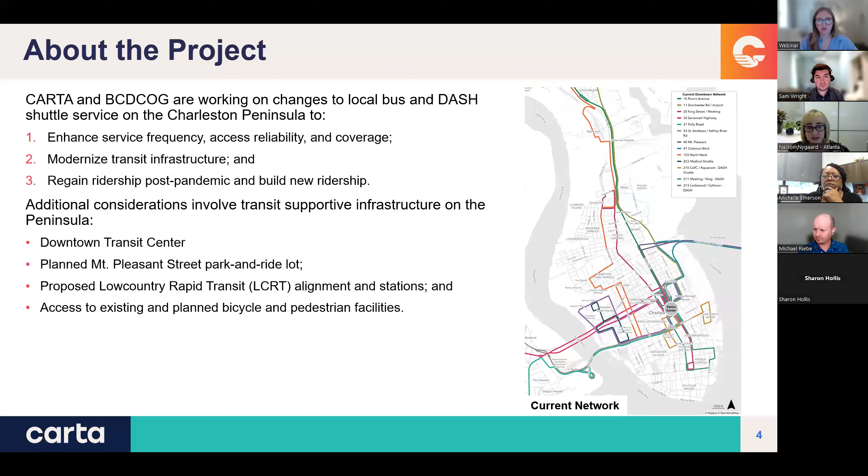the planned park and ride lot at Mount Pleasant Street, which will replace the former HOP lot, the planned Low Country Rapid Transit bus rapid transit service and infrastructure, including the alignment and stations, as well as existing and planned bicycle and pedestrian facilities. Next slide.

So this project has been going on for just about a year, and we're getting very close to wrapping it up. We're in the final phase now of community outreach, before we develop the final report. Next slide.

And so now we'll take you through some of the downtown concepts that we've come up with. As Milbury mentioned, we are sort of towards the end of this study, but we've done a lot of work looking at existing conditions, going out multiple times to the community before and asking what they'd like to see. So the concepts that you see here are really reflective of a lot of that previous effort, both looking at where transit may be the most beneficial and where people were looking to have transit services serve today and in the future.

So here you can see on the left, we have the current network in the peninsula or downtown, and on the right here, you have two maps, both a pre-LCRT and a post-LCRT. LCRT being the Low Country Rapid Transit Line that Milbury mentioned earlier, where it'll be a rapid BRT service that will be coming into the peninsula.

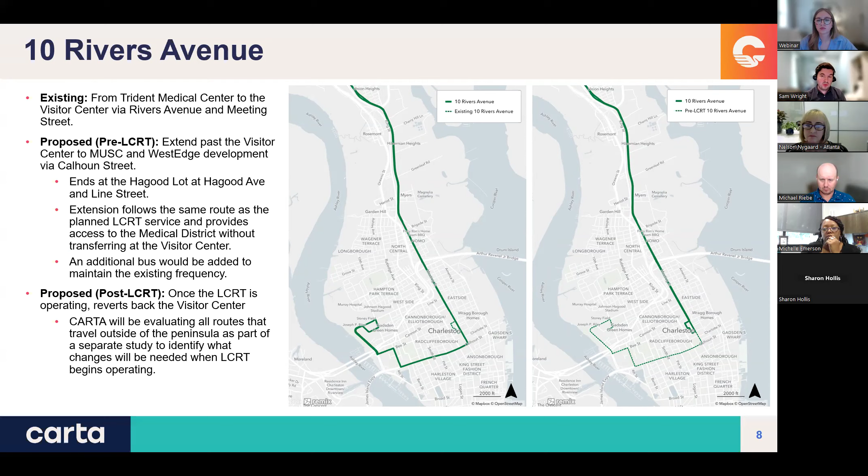Route 10 is Rivers Avenue, currently stopping at the Visitors Center. It's proposed to extend through MUSC to the West Edge development and the future park and ride lot that will be there, which will be the terminus and actually follow the same path as the Low Country Rapid Transit line before LCRT is in service. After it's in service, it would return to terminating at the Visitor Center. This also includes some frequency adjustments, particularly to get people used to some of the frequencies expected with LCRT, although not fully at the full rapid transit level that will come once the BRT line is in service.

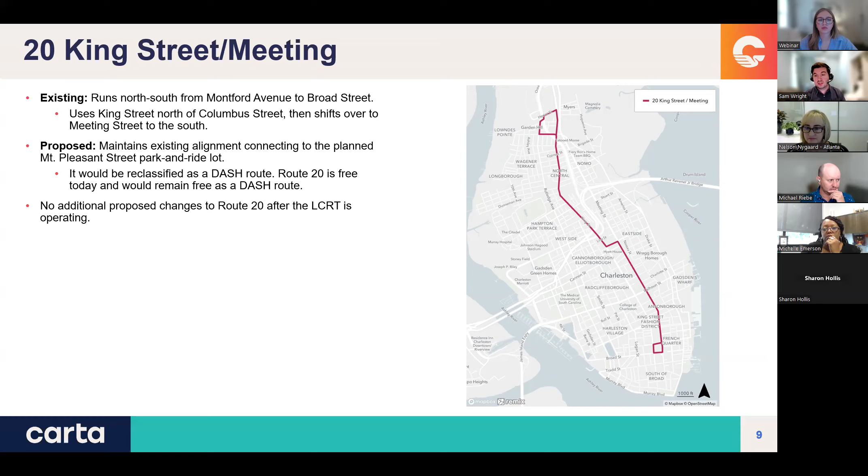For Route 20, we have the King Street meeting route. It's currently a free route in downtown, although not considered a dash route under the current designations. The changes here are mostly for frequencies and spans of service, really trying to increase some of the frequency, and then transferring Route 20 into a dash route so it can be branded as such, operating fully within downtown and providing more rapid service.

For Route 102, the North Neck, we have a few changes. Pre-LCRT, it's transitioning the end of line around the Gadsden Green Homes and MUSC to really serve those areas and connect with where Route 10 would extend. Post-LCRT, it'd be connecting at that West Edge park and ride facility and ending at the end of the LCRT, where transfers could be done to get further south or east on the peninsula. In the post-LCRT scenario, we're also proposing to serve Rosemont and have that be the northern terminal. Any future alignment to the north, particularly in North Charleston, would need to be considered as part of another study looking at potential future services in North Charleston.

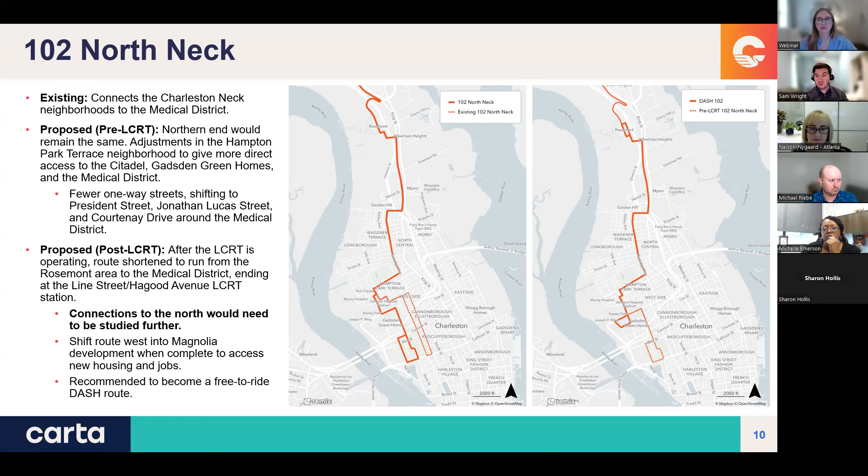The 210, which is the College of Charleston or Aquarium Dash route, today mainly serves around the College of Charleston, goes to the Visitor Center, and then out towards the aquarium and museum on the east side of downtown. The proposal is to have the service stay mainly on Calhoun Street to act as an east-west connection from MUSC to the College of Charleston and all the way out to the Harbor Walk area. This would no longer go to the Visitor Center, but would make multiple connections with other routes that would go there. The 211, the Meeting Street Dash route, is probably one of the larger changes for sure.

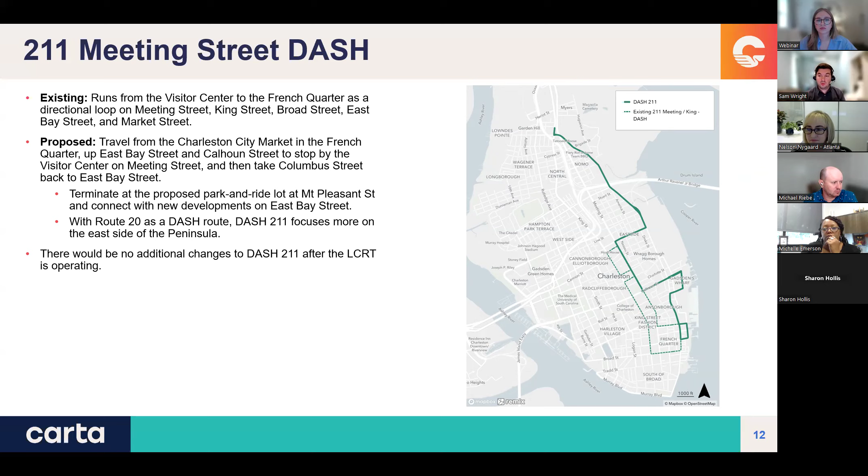Instead of a one-way loop that goes along King and Meeting Street through downtown, this one would stay on Meeting Street past the Visitor Center, then extend north to the future Mount Pleasant Park and Ride lot mentioned earlier, along Bay and Morrison. To the south, it would head over to the east, so you'd still make that connection from the Visitor Center over towards the aquarium, and then further south into the French Quarter along East Bay, providing a bit of parallel service with what Route 20 would be on Meeting.

The 213 is also a larger one-way loop, with the 210 picking up part of Calhoun Street. The 213 would be able to operate more bi-directional service, a bit more intuitive for people, providing a connection from the Visitor Center a little to the north and then west to hit the north side of MUSC and connect with the terminus of the proposed 10 or the future LCRT.

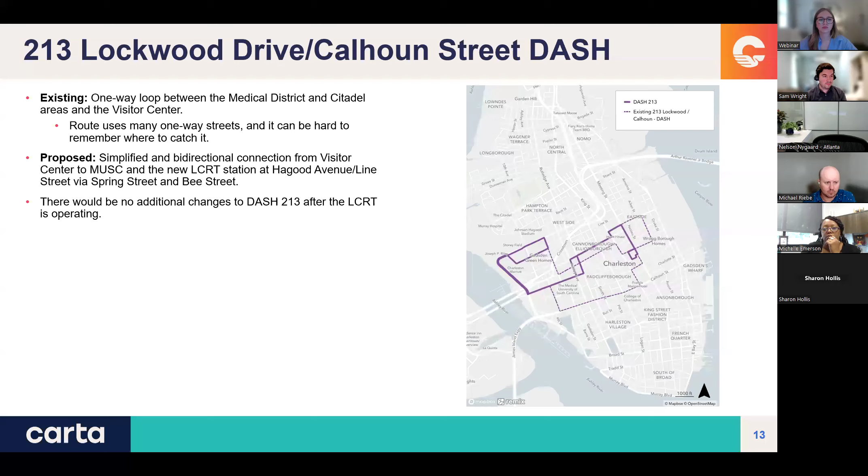So that was a lot of the larger changes proposed in some of the maps you saw earlier.

We took all the concepts, all the proposed changes in terms of alignment changes and frequencies, out to the public back in February. We had an online survey open from February 14th to March 14th, which got just over 500 responses that gave fine detail on route-specific likes and dislikes. We also went out in person to multiple bus stops, talking to riders about what they thought of some of the routes that went by those stops. That was on the 21st and 22nd of February.

The next slide will take us through the overall response rate to those route changes. As I mentioned before, this is covered in much more detail and length in a document that will be soon on the project website.

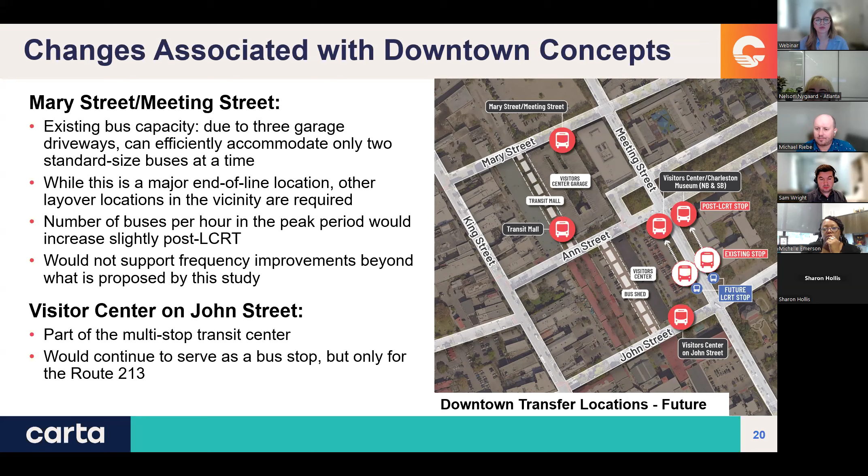For the Visitor Center and Charleston Museum stops on Meeting Street, this is where it gets interesting. With the implementation of the LCRT, the existing northbound and southbound bus stops are going to need to be moved a little bit. The reason is that there are different platform or bus loading heights for the BRT buses compared to CARTA's existing bus fleet, so the existing bus stops need to shift a bit.

So we're recommending, as you can see in the diagram here, that the local bus stops be shifted to just south of Ann Street, which means they'll be on the same block as the LCRT stations.

There will be some changes in the number of buses at the local bus stops on Meeting Street. There are some fairly significant increases in both directions before the LCRT comes online, not quite as many after it does. And again, that does not consider any frequency improvements beyond what's proposed by this study.

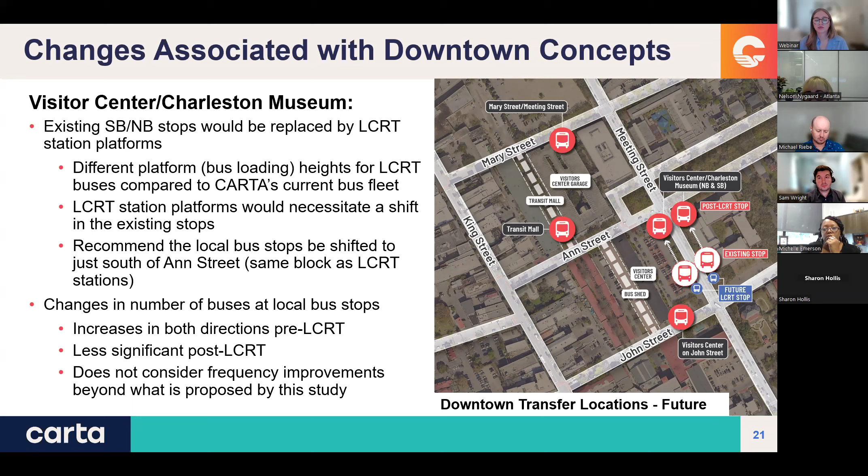I mentioned layover, and layover is a big need. Right now, the layover location is really kind of inconsistent. What's really needed is a 7 or 8 bus lineup, ideally near restrooms for the operator to take breaks, and preferably at the same location as passenger transfers are taking place.

As I mentioned, that is just not feasible at the Mary Street and Meeting Street location because of the garage entrances. So we looked at a number of different potential options. We're not making any specific recommendations at this time, just looking at what might be possible.

One thought we had was the transit mall, which you can see in the photo here. The idea would be to reconstruct the transit mall to make it able to accommodate the 7 or 8 bus lineup.

The tricky part about the transit mall is if you look at the picture, you can see it's fairly narrow, and really and truly it's not wide enough for buses to pass each other. So it would really need to be widened in order to turn that into a functional layover point.

Another side note for those of you that follow the Low Line plan: this is proposed to be part of the Low Line, which is a bicycle, pedestrian, or recreational trail. So that's the transit mall in a nutshell.

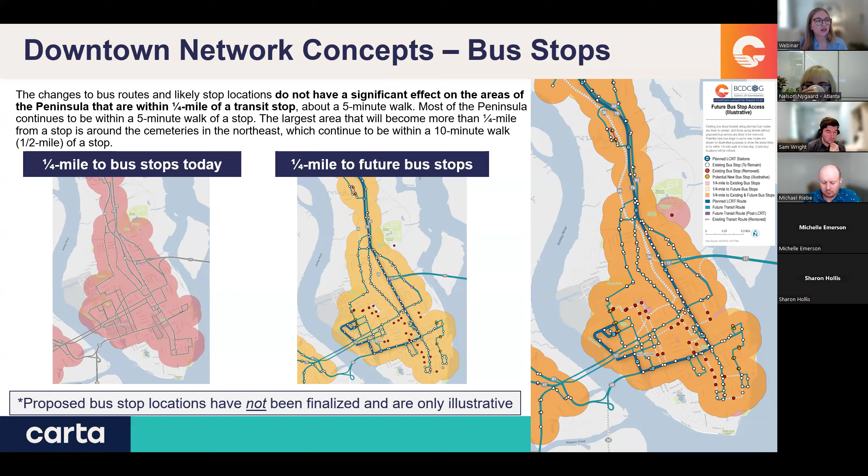We looked at ongoing work to date and plans for first and last mile connections on the peninsula through other projects that have been ongoing over the last several years, including Walk Bike BCD, the People Pedal Plan, the Lowcountry Lowline Plan, and LCRT's Walking and Bicycling Access to Stations memo, as well as their ongoing transit-oriented development plan.

The most similar in terms of areas we've been looking at is that transit-oriented development, or TOD plan with LCRT. It covers the majority of the recommended changes we would consider for these routes, and there are a few potential additional changes.

We have more detailed recommendations on these, but at a high level we are recommending adding new bus stops to maintain as short as possible walking distances from all neighborhoods on the peninsula, and helping to facilitate an easy walk to transfers around the visitor center through some of those potential changes that Milbury mentioned in terms of transfer and layover locations.

And then really looking to reconcile some of the ongoing plans, particularly recommendations for new bicycling infrastructure on the peninsula, to make sure they align with this proposal.

One of the key things that will need to be resolved is that on a number of streets, there are recommendations for bicycle facilities that require space to accommodate them, and we also require space to operate the bus on those streets. In some cases, providing the recommended dedicated bicycle facility would make the street too narrow for bus operations, so we may need to look at revising the type of facility or moving things over a block for the plans to coincide.

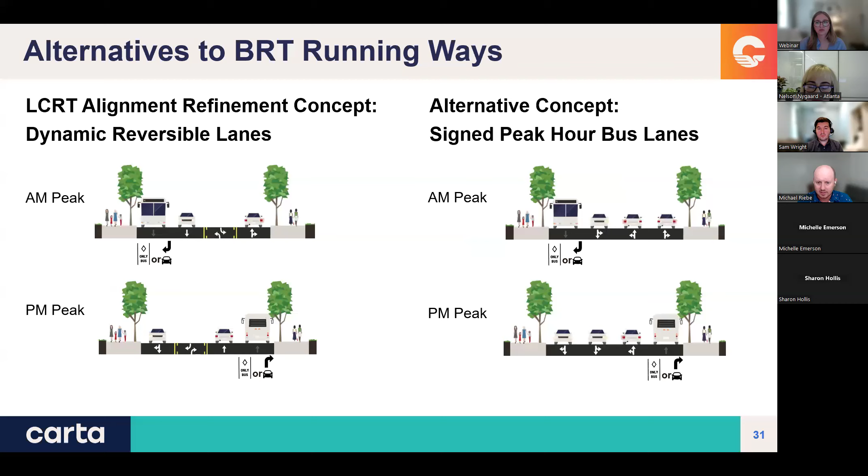We also looked at a comparison of the former dynamic reversible lanes concept with this signage-only peak hour bus lanes concept, looking at some qualitative and quantitative metrics. A lot of similarities here, but some of the biggest differences between the alternatives were the cost, physical infrastructure required, and upkeep as well.

The dynamic reversible lanes would require overhead digital signage, putting it in block by block at a high frequency. It would also need to be carefully managed for safety so that vehicles are assigned their proper lane, with some changeover period where you need to have vehicles clear out as directions change. The signed bus lane requires just signage, with the option of adding some pavement stencils. That was one of the biggest differences we saw.

The adaptability of both of these concepts are pretty high. Dynamic reversible lanes are basically instantaneous, so you can change it whenever you need to if you need to expand the hours of operation for the peak direction. With the signed lanes, you'd have to change what the signs say.

So with the signed bus lanes, these peak hour bus lanes are adaptable in that they can be implemented on a block by block basis. It's better for continuity, but you can have it start and stop as needed if there are certain blocks with congestion issues. With the dynamic reversible lanes, this kind of system would need to be operated wholesale throughout an entire segment length, and you can't really start and stop it as needed because of the risk of head-on collisions.

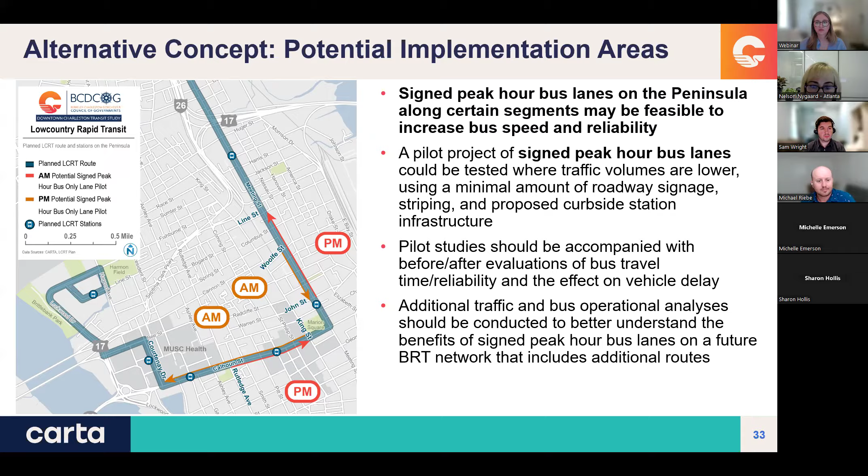And that was it. I think I'll pass it off to Milbury for next steps.

Thank you so much, Mike. As I said, we're rounding the bend on finishing up this study. We're in our final phase of public engagement, including the open house you're participating in. We'll also be having an in-person open house tomorrow evening at the Charleston Main Library in Community Room B. We're having a couple of stakeholder meetings Wednesday morning with the hospitality industry and the College of Charleston, and then presenting at the CARTA board meeting Wednesday afternoon.

Please do follow us on the project website. We'll be issuing a number of social media posts and getting information posted there. Following that, we'll turn our efforts towards putting out the final report, a draft and then a final, which we'll do next month in July of 2024. And with that, that is the end of our presentation, so now we'd like to open it up for questions and answers.

It looks like we got one comment already in the chat that Megan has responded to, Megan Ross. Thank you very much.

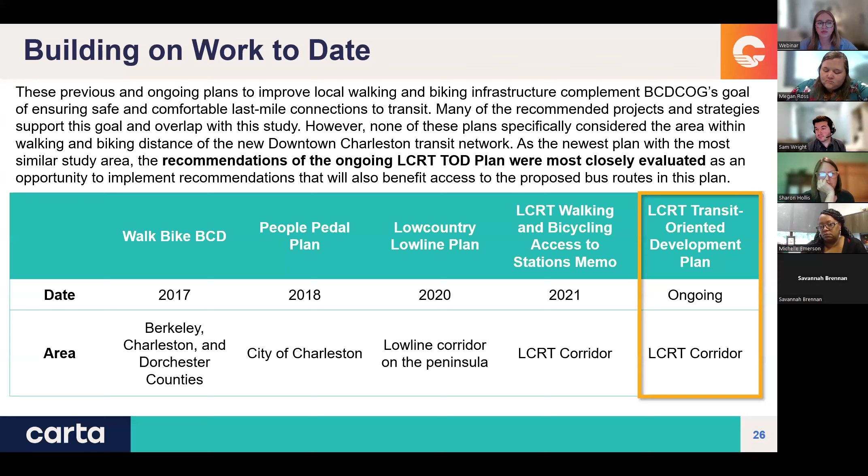Any questions about the proposed service changes?

I see we have a question in the chat from Ray. Would it make sense to route the 30 on Calhoun Street and Lockwood so that it had direct access to College of Charleston and MUSC? This would also mean more service on the Calhoun Street corridor, better justifying bus lanes on the corridor.

Turning this one over to Sam to discuss. Sure, yeah, so I know we had taken a look at how the routes were accessing the peninsula, and obviously the Route 30 Savannah Highway route comes in to the north along, and utilizes both Spring and Cannon Street.

A focus of ours was to still be able to utilize both bridges over Ashley River and still provide some access to the north side of MUSC. It certainly is a possibility that the 30 could be routed how the 31 and 33 are routed today, and are proposed to be routed in the future, to make access to Calhoun Street.